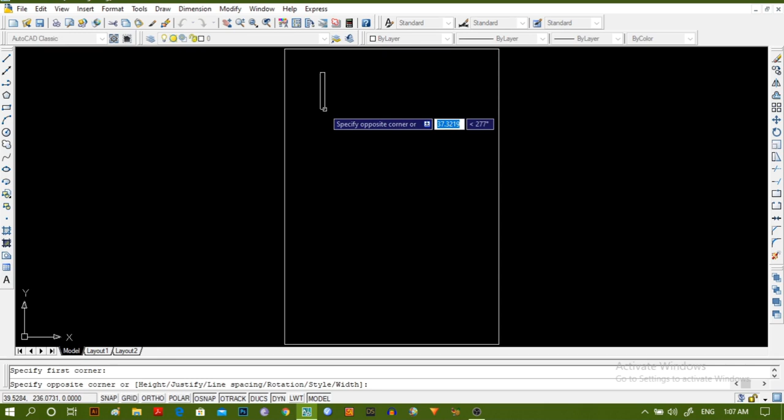Now we have to draw the wiring diagram of a direct online starter. We are taking the 5, enter.

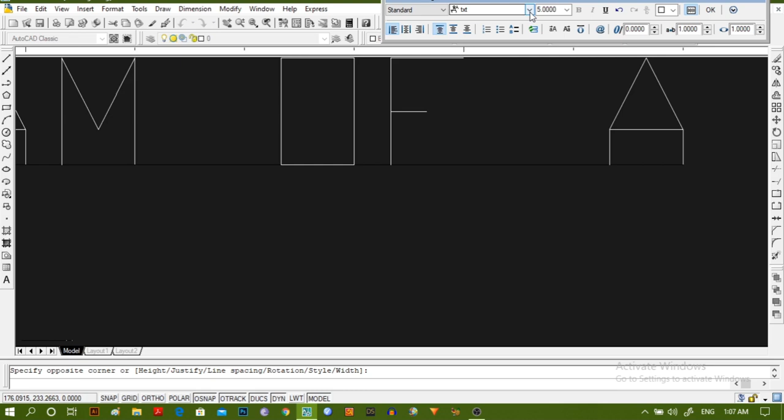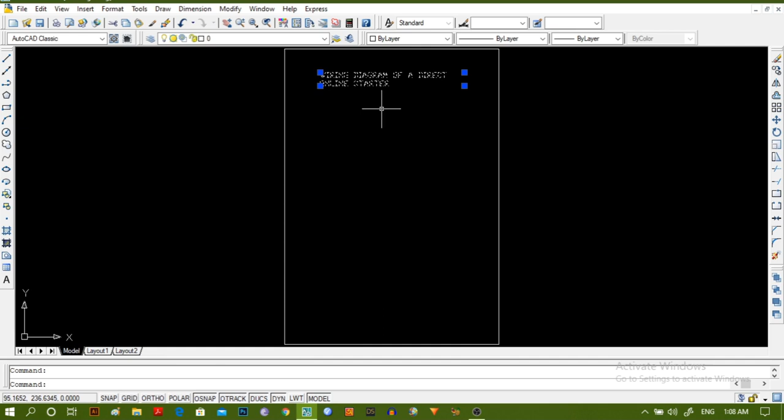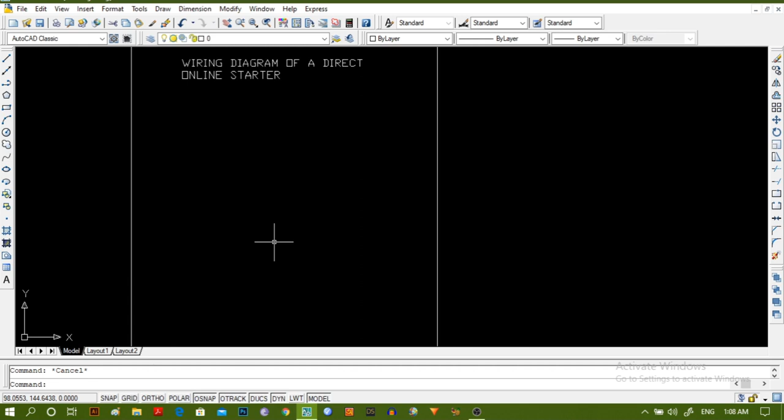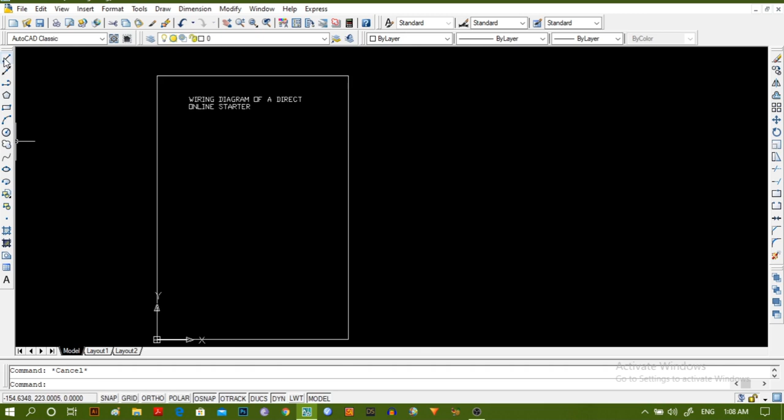Okay, so wiring diagram of a direct online starter. First we are going to draw the lines of a three-phase system. So at first we are going to draw 3 random straight lines for representing the three-phase system.

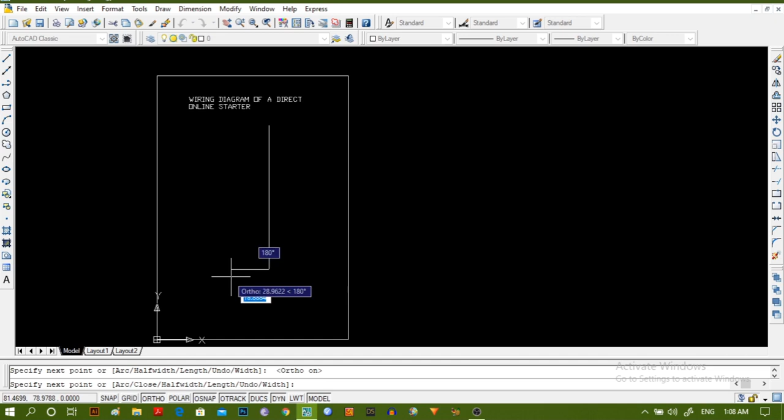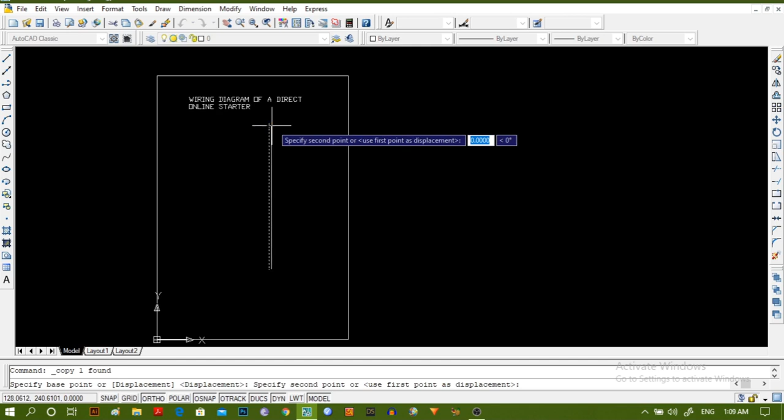Made once. Now I am going to copy this one.

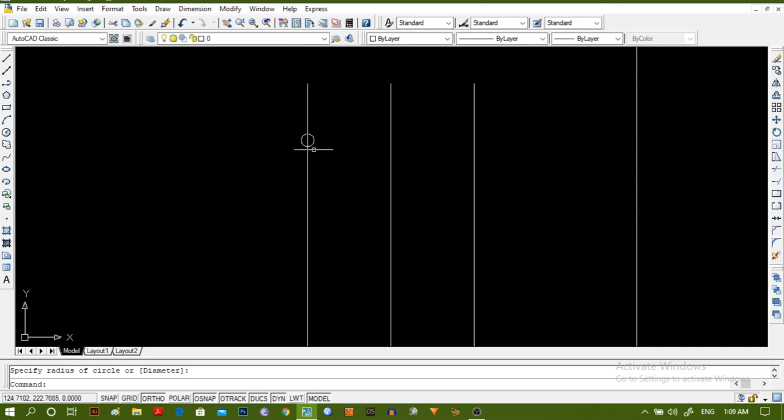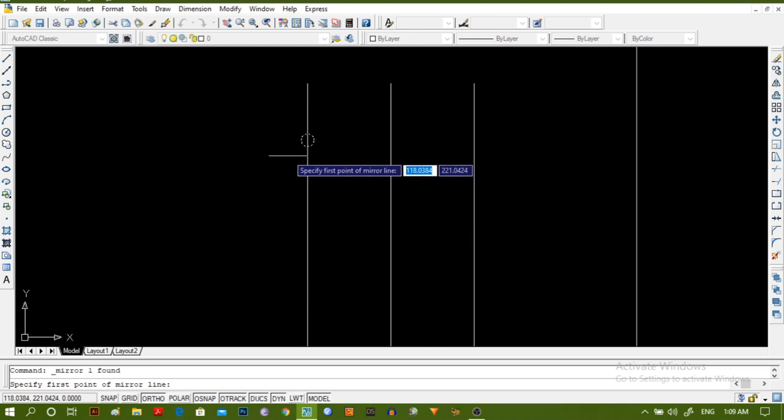Now we have to make 3 disconnect switch fuse unit. Made one and made the mirror of other one. Don't want to erase the source object, so no.

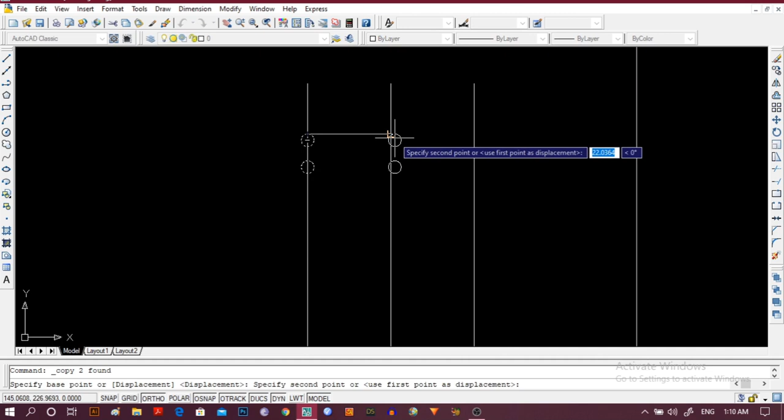Now simply I am going to copy these 2 to the others. Escape.

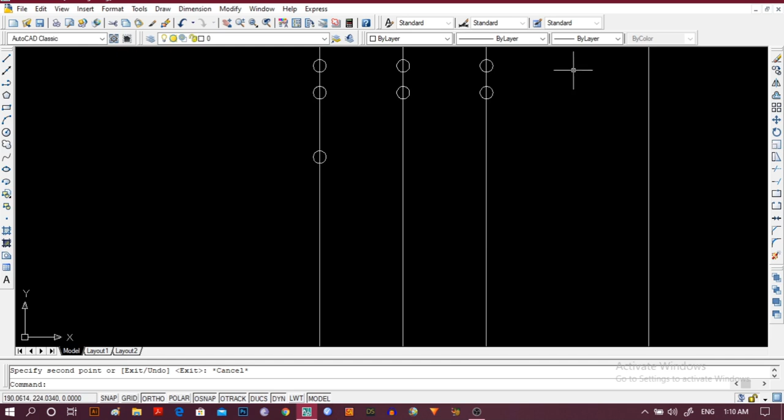Now we have to make a copy here for this one, and we have to make a copy of this one also.

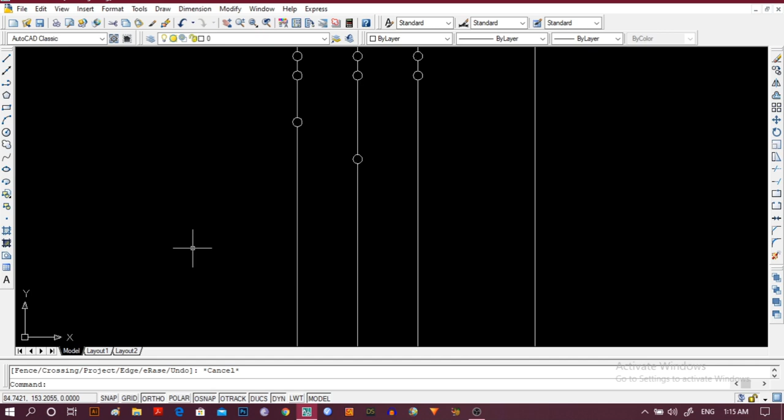Now we have to make 3 contactor relays. So we will take a straight line.

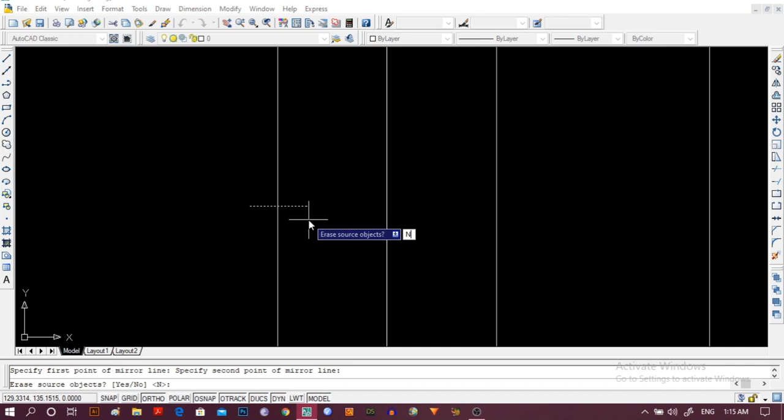Do one, made a mirror of this one. Made a mirror of this one. I will keep the image. So done.

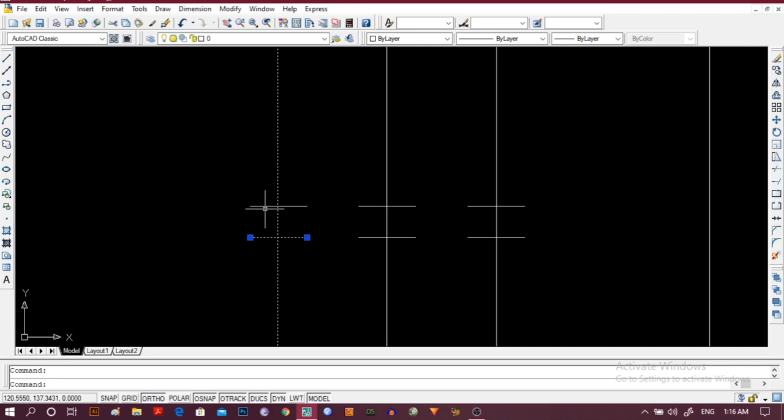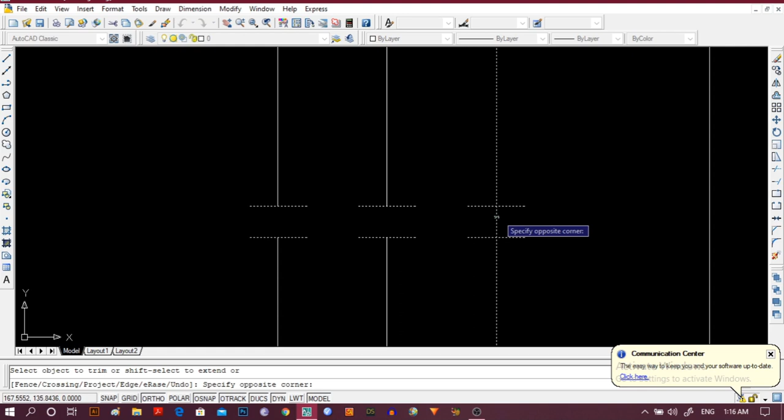Now I am going to copy these two. Simply going to copy, and now trim the middle portion. Okay, done.

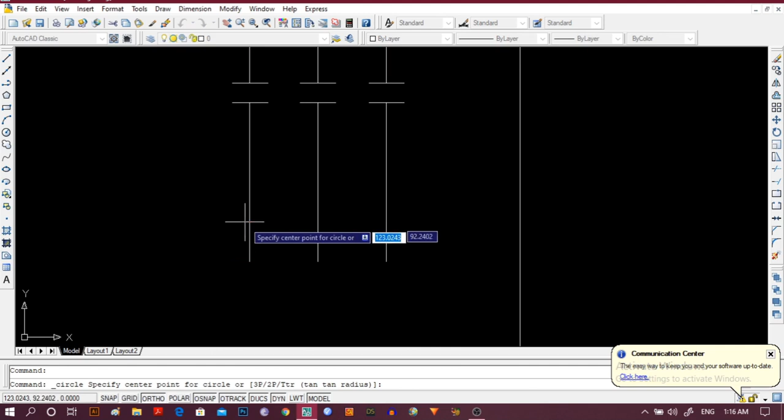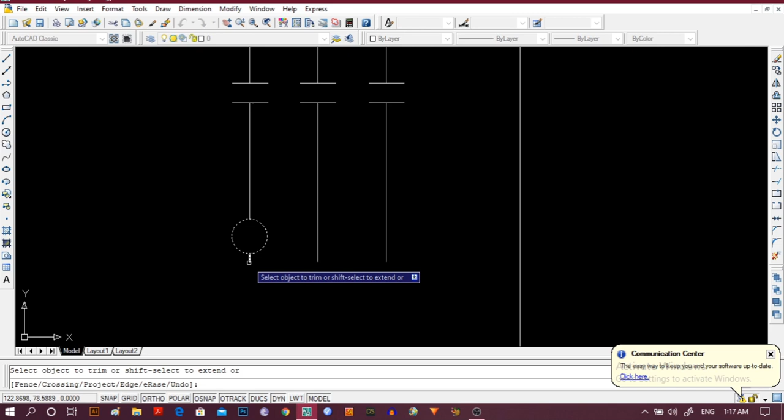Now we have to make the thermal overloads. So we are going to draw a circle and made a mirror of it.

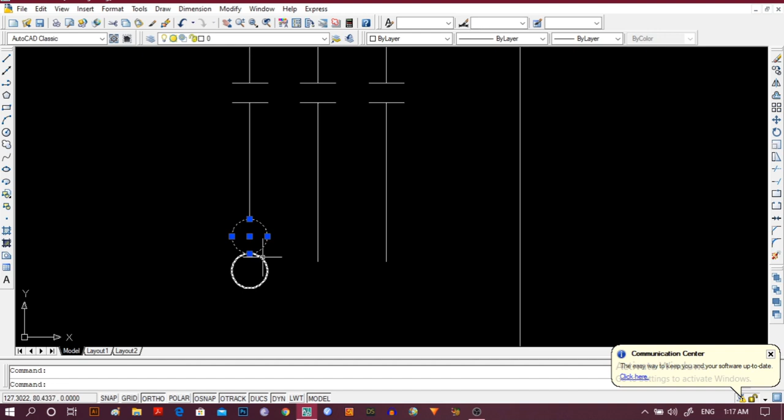And for all the other two, and then break the desired path.

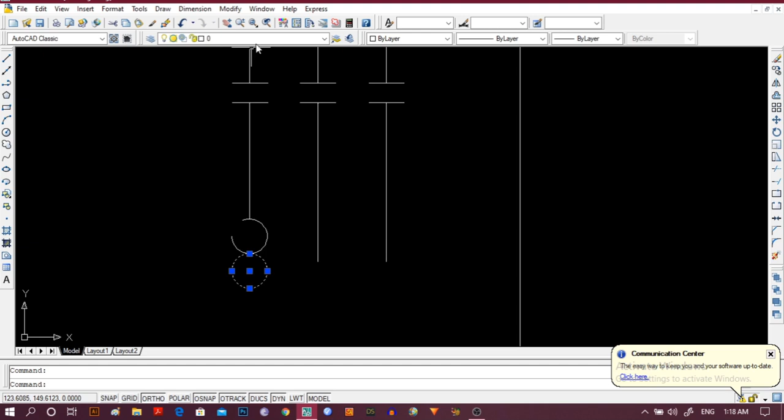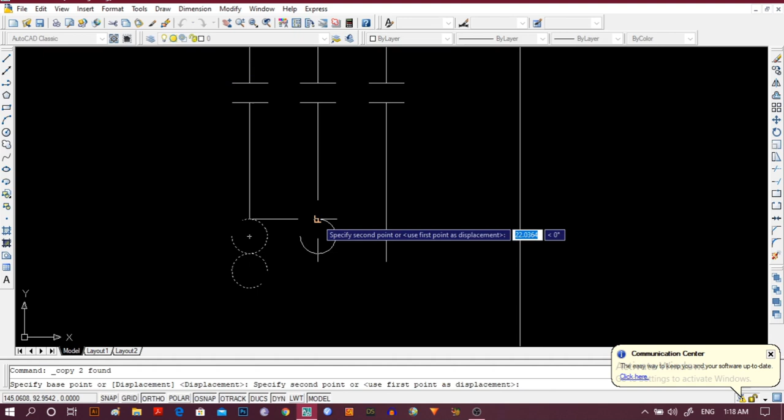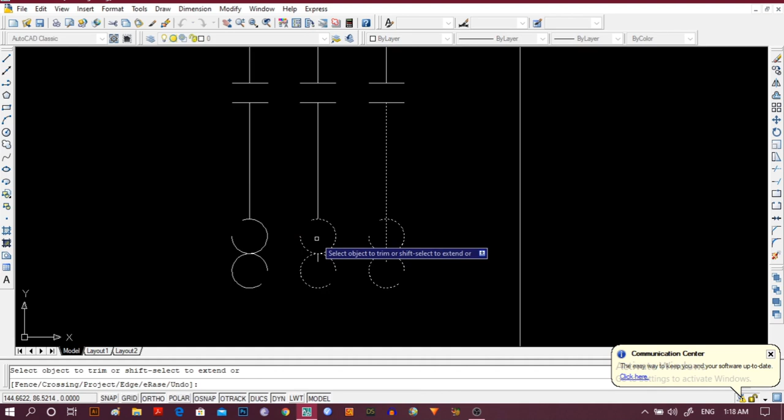Okay, done. So I am going to copy this one and put to the others. Now I have to trim all these things. So let's trim. Now delete the excess part.

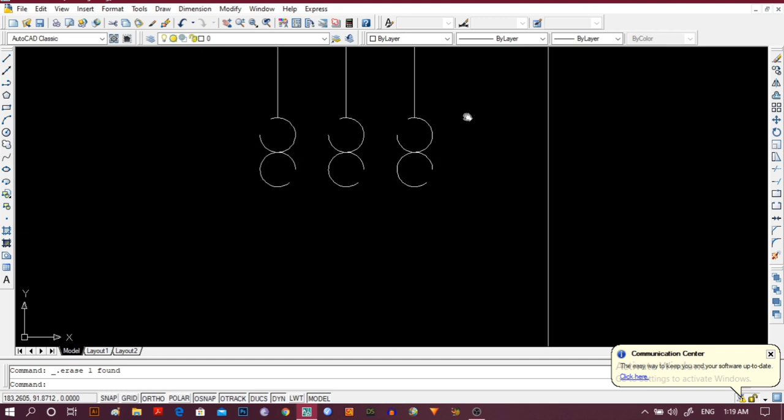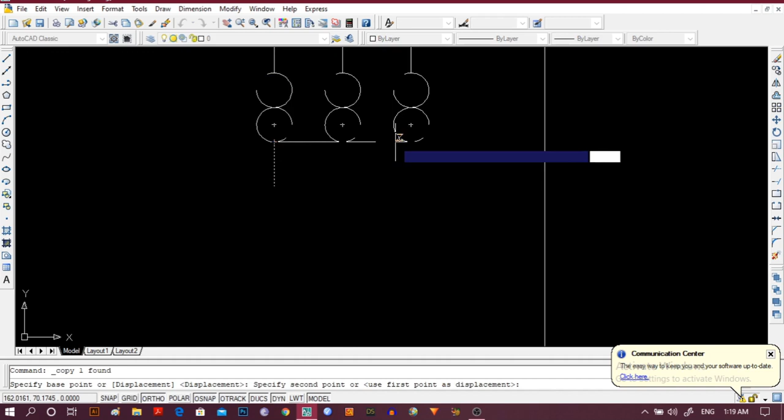Okay. So now we are going to draw the three-phase induction motor. So again I am going to copy this one and draw a three-phase induction motor.

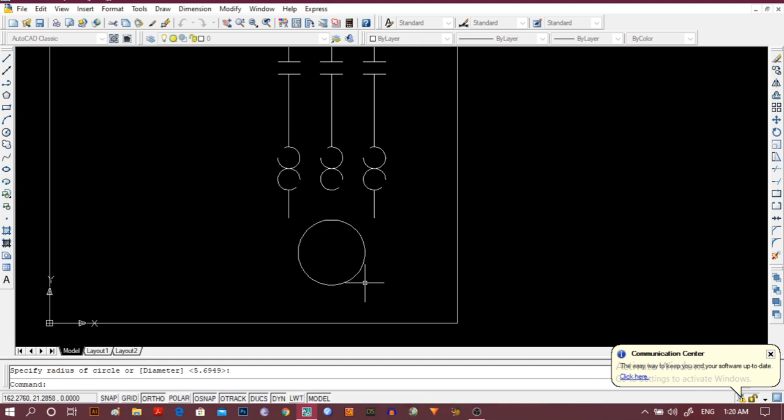Attach the required lines, make the ortho off and connect the other ends. So three-phase induction motor is already made.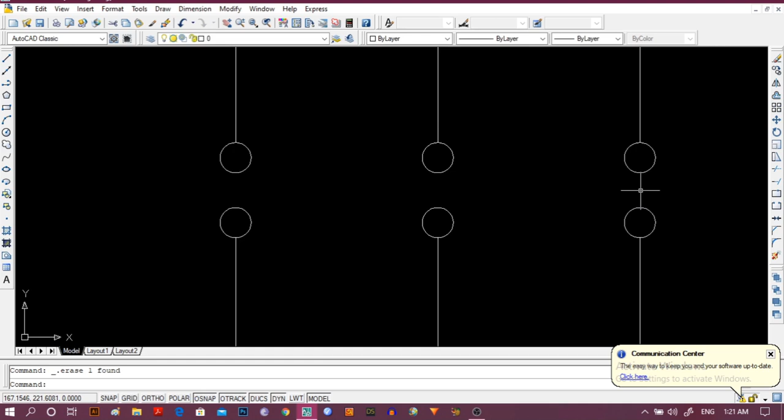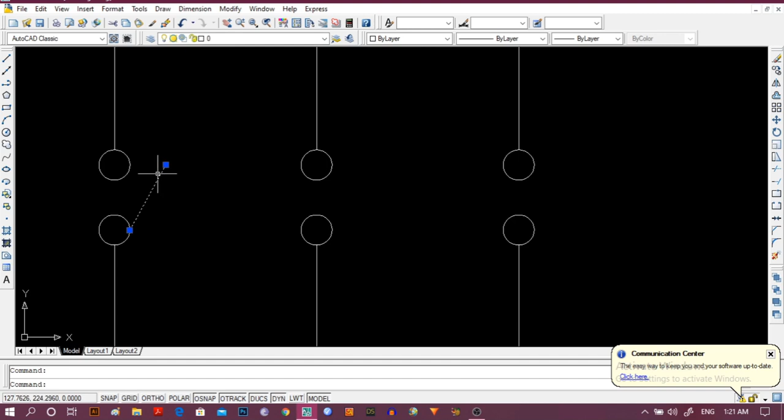Now we have to make the three connecting switch here. One is made and other is going to be copied. Done.

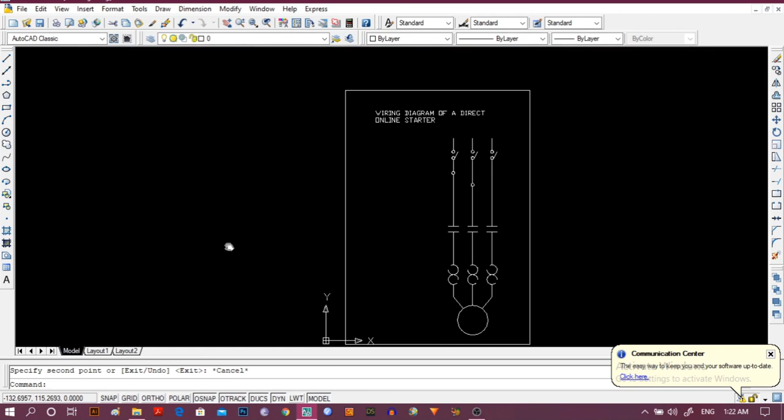Now I am going to make the thermal contactor part. So first take a polyline.

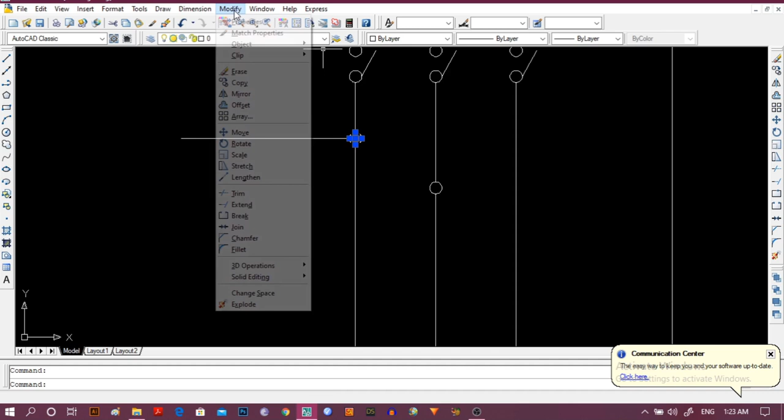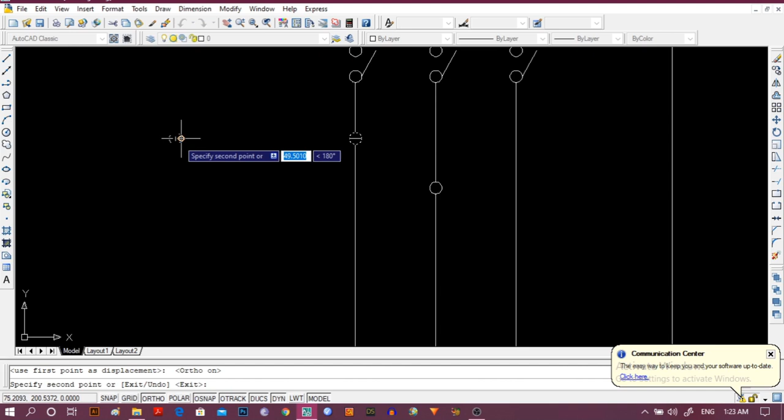And again I am going to make a copy of this one. Sorry, made a copy of this one. First I will need the ortho on. Okay, and then going to make a mirror of this one.

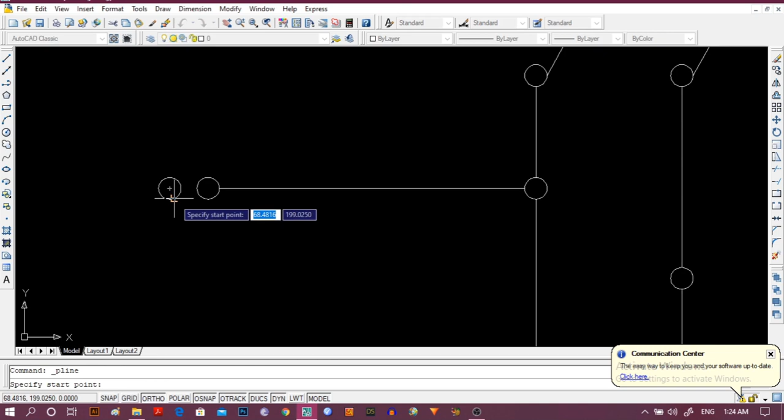So enter. So this one is made. Now we have to make this one as normally closed. So it will be normally closed. Now we have to find out a midpoint and we have to make a line. Okay, fine.

Now we have to close the circuit.

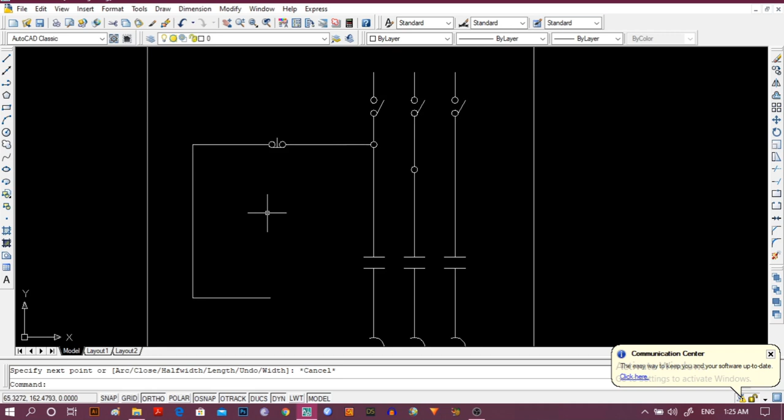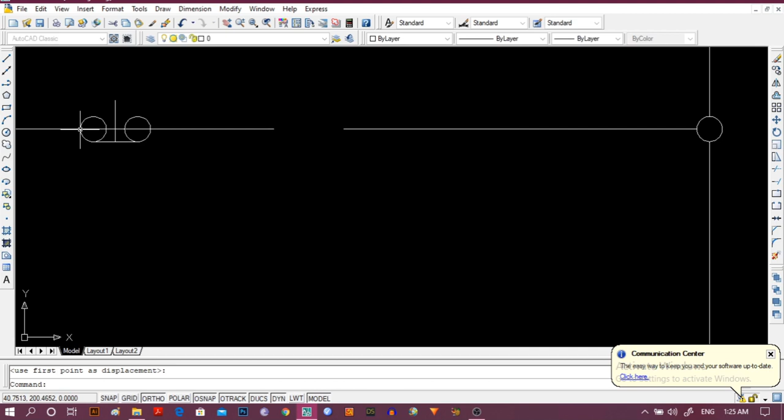Now I placed it little more. The space in between here become little more short. So I am going to adjust this one. Simply I am going to move this one. Okay, I am happy with the new arrangement.

Now I am going to trim all these things. So in this arrangement, in between somewhere you can trim.

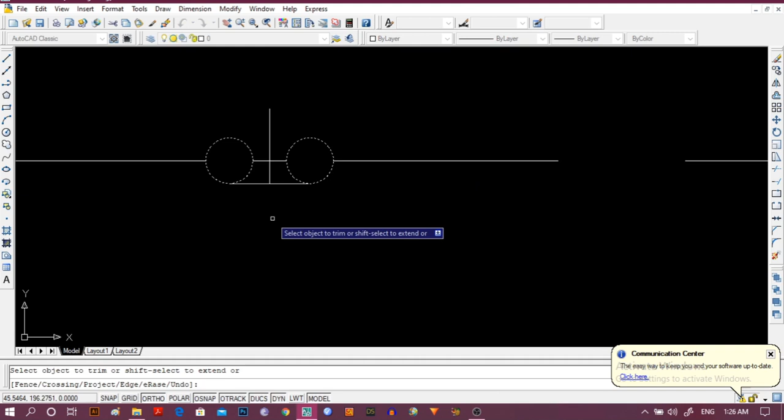So now I have to add this section. Okay, done.

So this line should be drawn depending upon this one. Let's see, I start from there. Now I am simply going to copy these two.

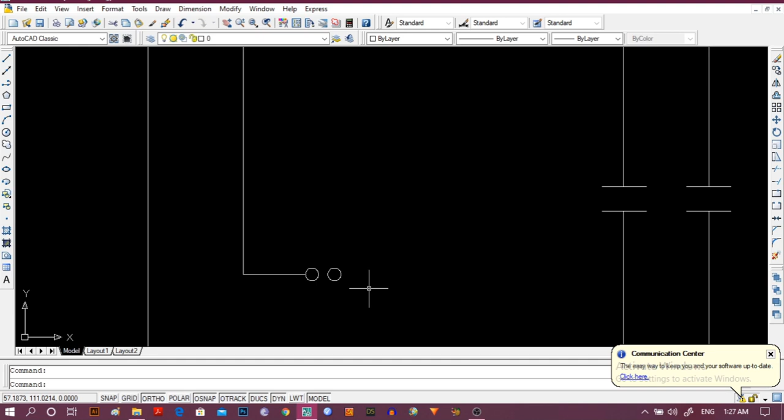Okay, so this end is a normally open end. So we have to make a normally open arrangement.

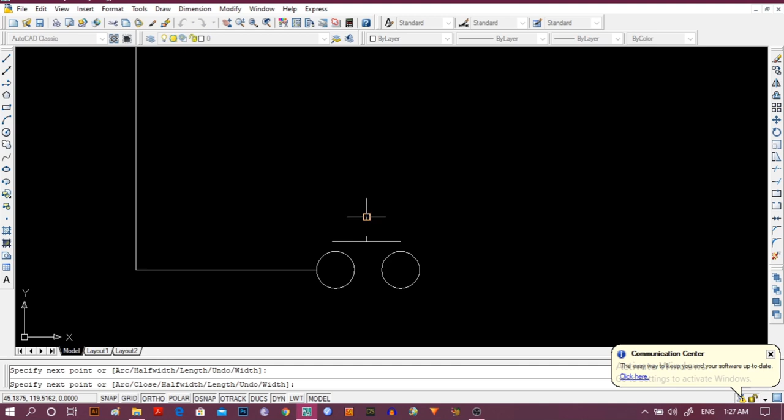Okay, so now we will complete the circuit arrangement.

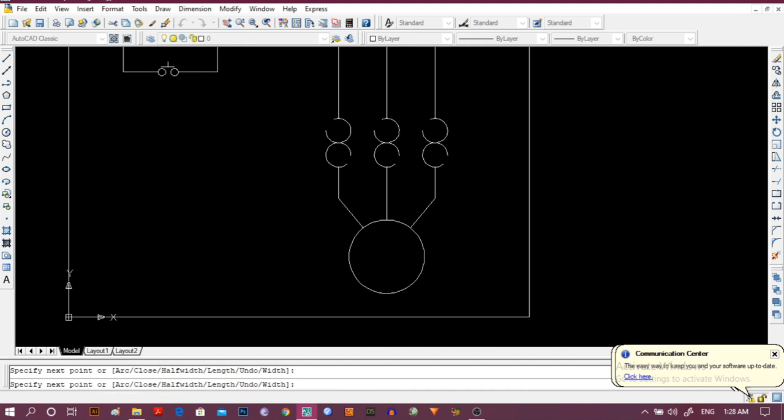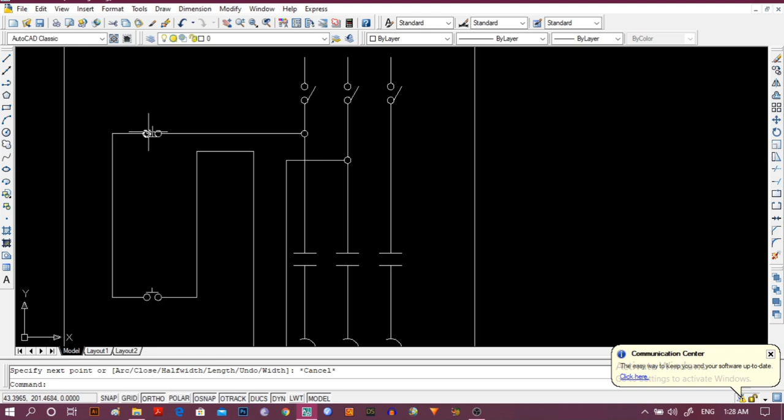So now I have to make a circle here, or I can copy also. So modify, copy, and I bring this one in the middle of this one.

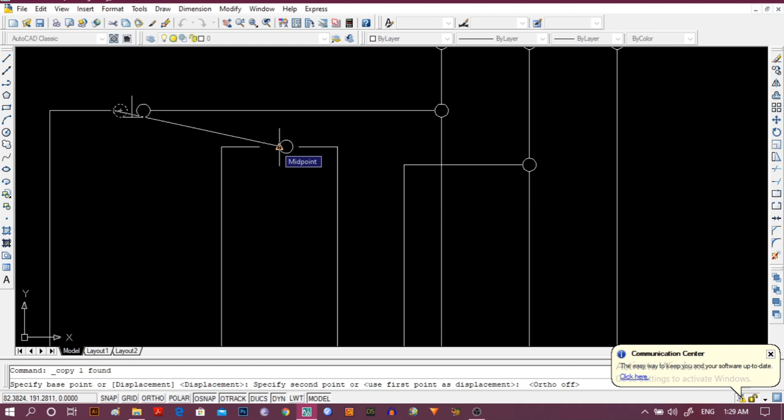So this seems to be the midpoint, but this midpoint is obviously shifting, so I cannot make this arrangement. Whenever I select, I have to select the midpoint. So I am going to select the midpoint, and then I can find this one is the midpoint. And now I am going to trim the mid one.

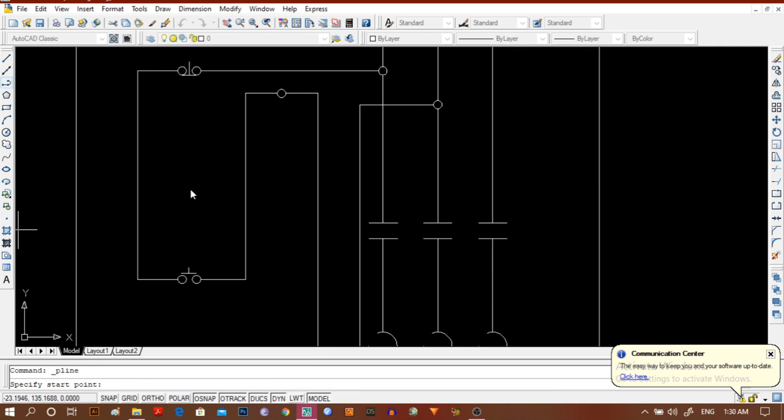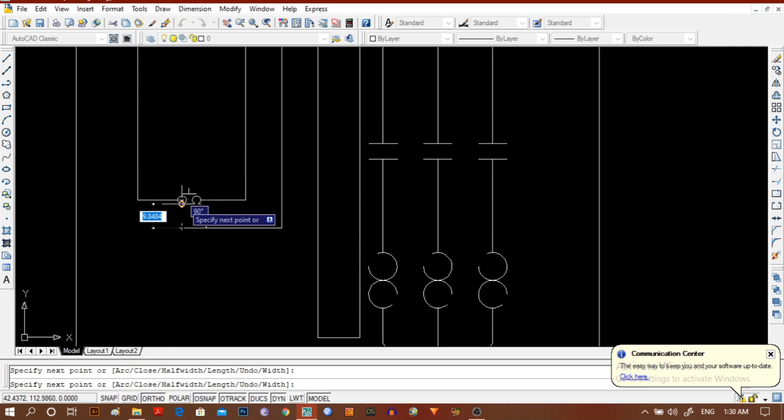Now I connect the rest. Okay, escape. Now I connect this one.

Now I have to make a contact here.

Now I am not going to copy this one. I am simply going to draw two lines here. Drawing one and copying other one.

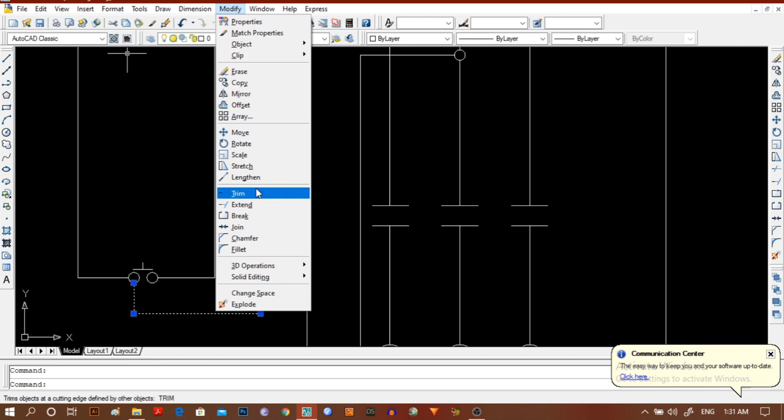Now trim all these three. Escape.

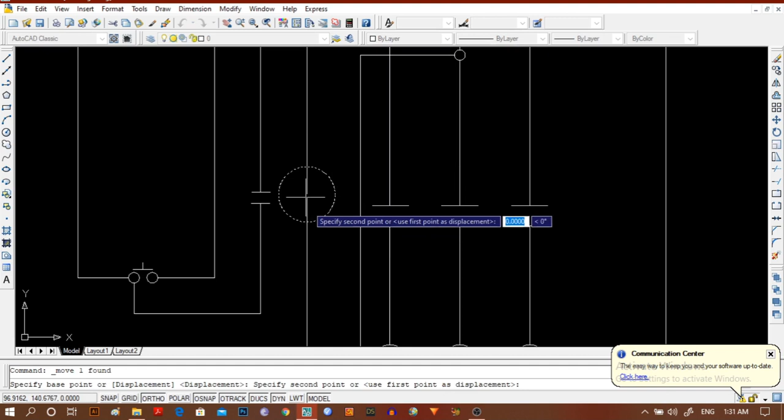And I have to make a circle here. Select this circle, and I have to move this one down a little bit. Okay, I am happy with this one.

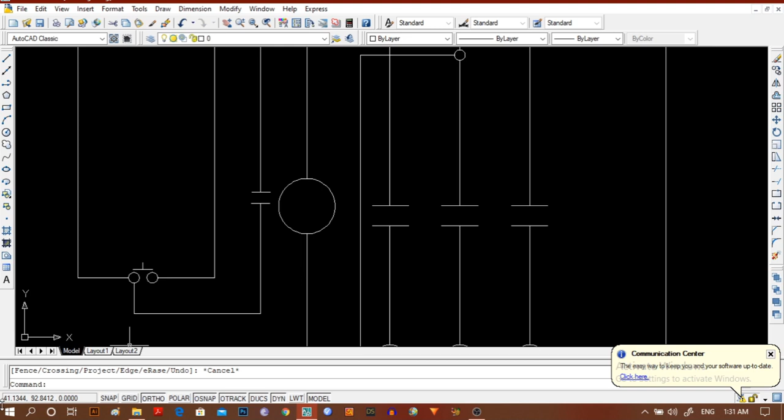Now I am going to trim the mid section. So there is another one.

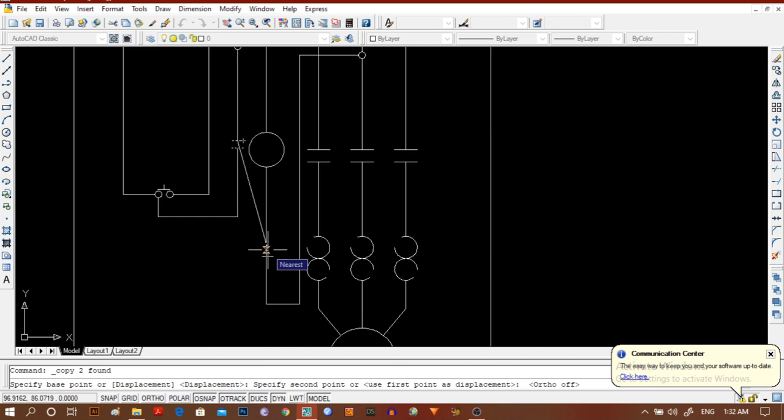Relay contactor here. So I simply copy these two and put this here. I am going to trim this one.

And make a cross hatch here. Done.

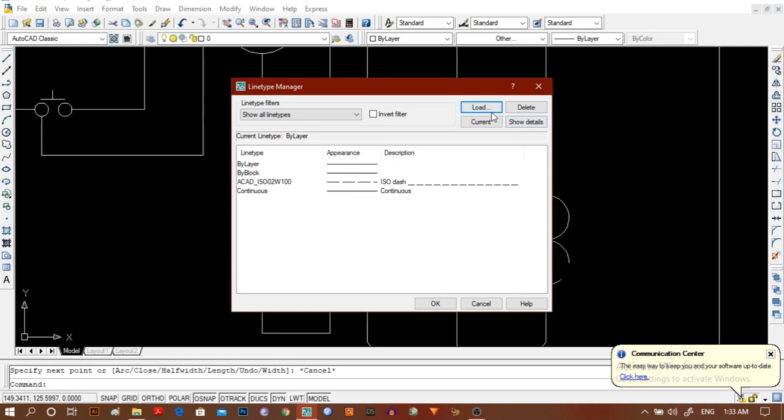Now I have to make the dotted line. So I am going to others, going to load and load the dashed line. And the line is loaded. Now I segregate the sections.

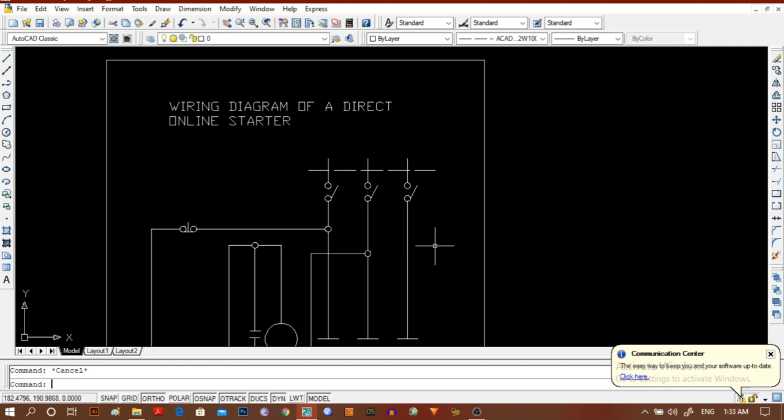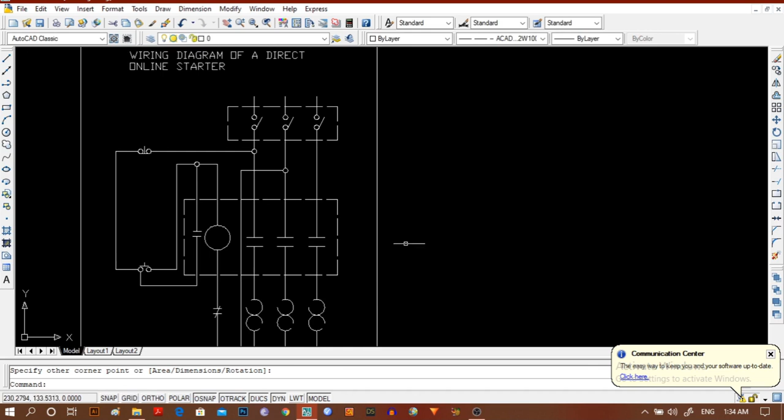So another one is going to be drawn with this section. And another one for thermal overload section.

So this is the complete arrangement of wiring diagram of a direct online starter.